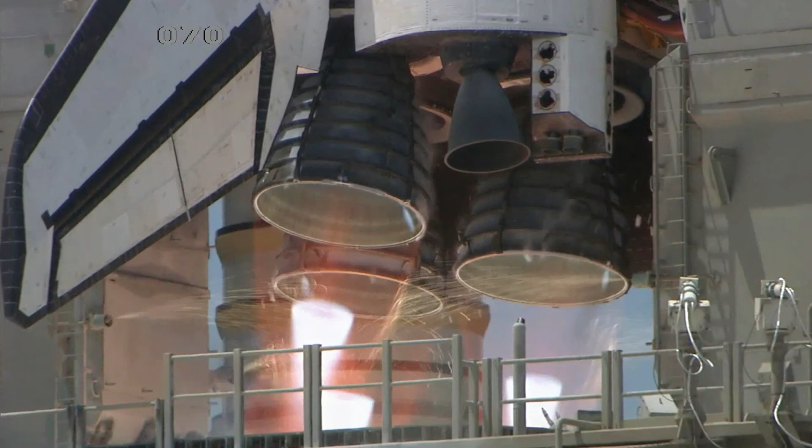Engineers use light metals because of their favorable mechanical properties. From the fields of aerospace, renewable energy, and electronics, we present some examples of mechanical properties in modern and future applications.

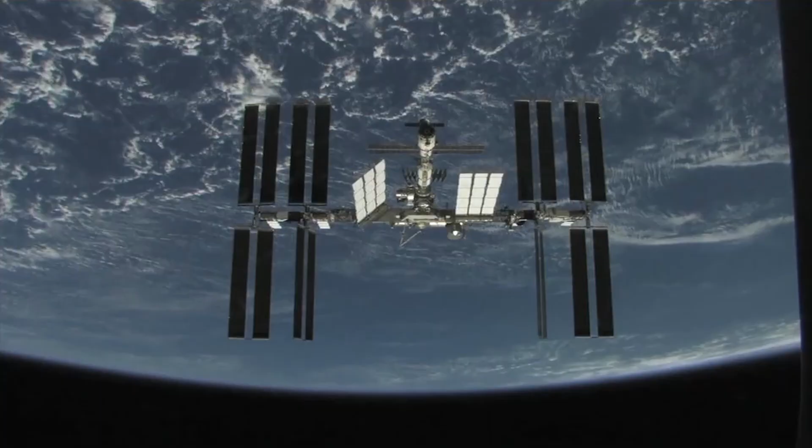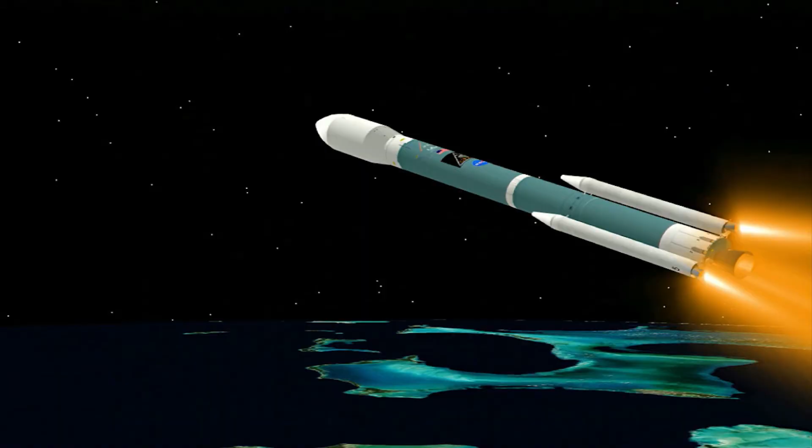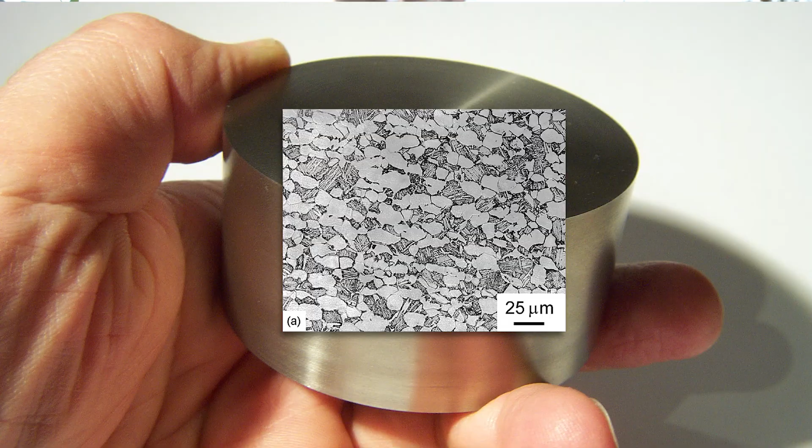Light metals are important for the aerospace industry, including aircraft and rocket applications, primarily because they're lightweight. But it's not just that they're lightweight. You still need the material to be strong and durable and survive varying amounts of heat exposure. When you combine all these things, aluminum alloys and titanium alloys end up being extremely favorable for the aircraft and rocket industry. Specific strength is an important concept in materials engineering, and it's the ratio of the strength to the density, or the material's weight.

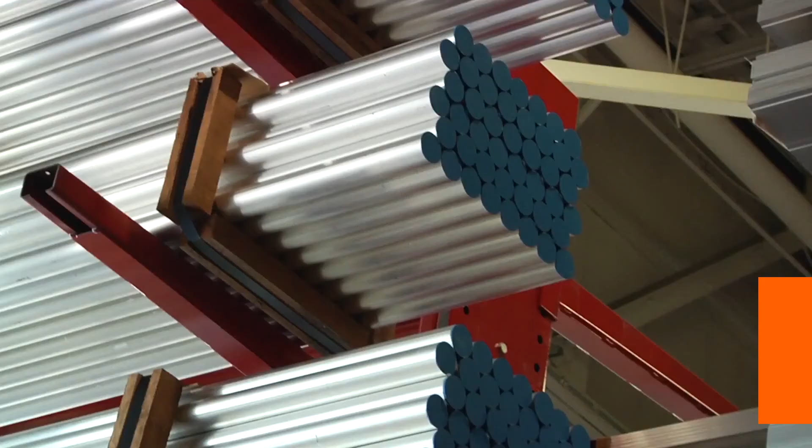This is important because aluminum alloys, for example, aren't as strong as steel, but they're a lot lower weight. When you scale your design according to that specific strength ratio, you find that aluminum is very favorable for many designs. Aircraft made from light metals consume fuel at a lower rate than those made from heavier materials. Although the structure may be thicker, the overall decrease in weight for a lighter plane is more desirable, making modern air travel affordable and efficient.

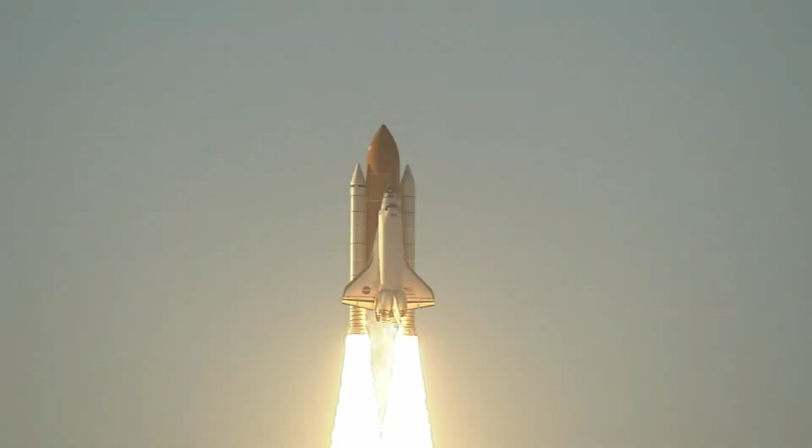Today, there are many aluminum alloys to choose from that offer a balanced set of properties to meet a variety of design needs. Advances in aluminum alloy development have created tailored alloys for specific design goals. Another aluminum alloy that's less common in widespread industry but still important is the 8000 series, which is aluminum alloyed with lithium. The main purpose of this alloy is that we still get good strength, but it's even lighter than other common aluminum alloys. It was used for the Space Shuttle external tank, where every pound or fraction of a pound literally means thousands of dollars in efficiency.

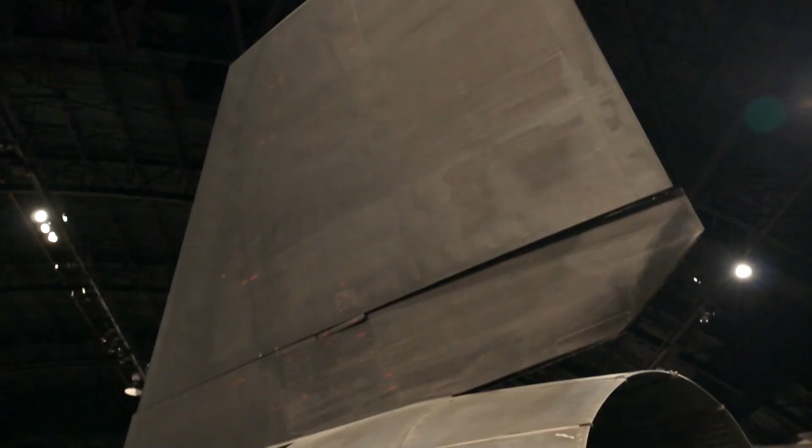One limitation of aluminum alloys is that they lose their strength starting around 300 Fahrenheit. Another lightweight metal that doesn't lose its strength at temperature is titanium alloy. Titanium is very strong, extremely tough, and holds up at temperature. Probably one of the most famous examples of the use of titanium is the SR-71 Blackbird. This aircraft travels at supersonic speeds. The heat generated on the skins just from friction traveling through the air requires a material that can hold up to the heat. Aluminum skins, unlike a commercial aircraft, would never hold up at those speeds. So titanium becomes extremely important to us at those temperatures.

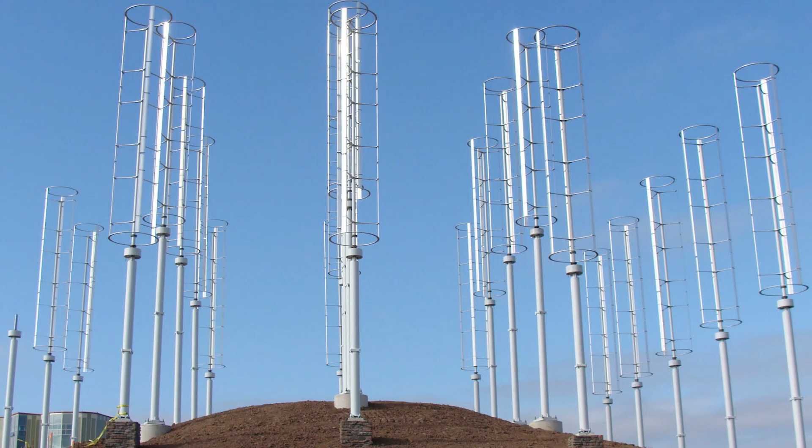Renewable energy such as wind and solar power is a growing field with great potential for light metals. While small wind turbines for urban use are typically made from aluminum, large wind turbine blades usually use composites. Current research is exploring hybrid fabric metallic constructs to decrease weight and increase efficiency. As this technology evolves, light metals may be key for the improved and affordable harvesting of wind energy.

When considering the design of wind turbine blades, one material that finds applicability is aluminum. It's readily available, well understood, has high fatigue strength, is lightweight, and we can easily machine it into different shapes for these blades. One thing I mentioned was fatigue strength. That's important because as your wind turbine cycles, as the wind goes on and off, you're going through a process called cyclic loading, where you're turning a load on and then off.

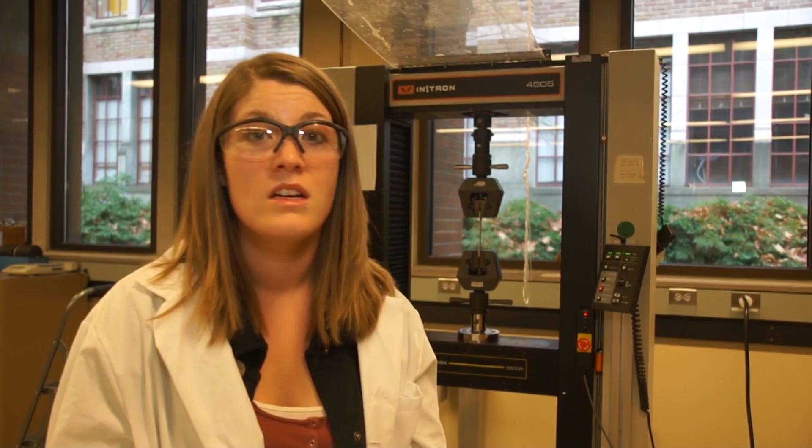What metals are known to do is fatigue, and too much fatigue can cause failure, so we need to consider fatigue when designing. In this test behind me, we would do a similar test where we're actually loading and unloading the specimen. That can give us information about the fatigue strength of the material.

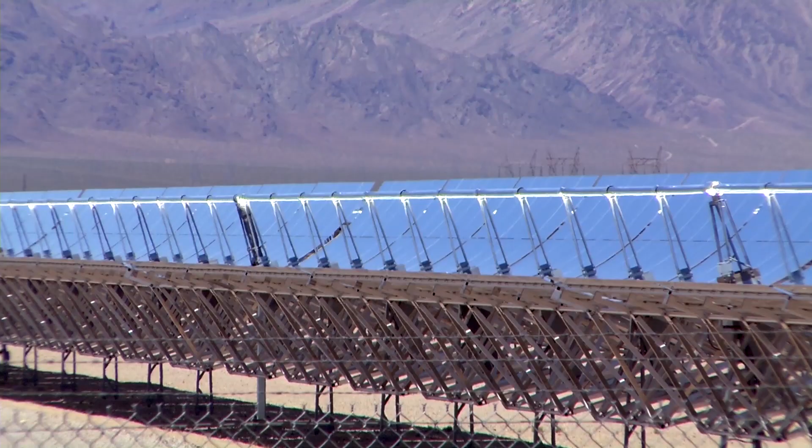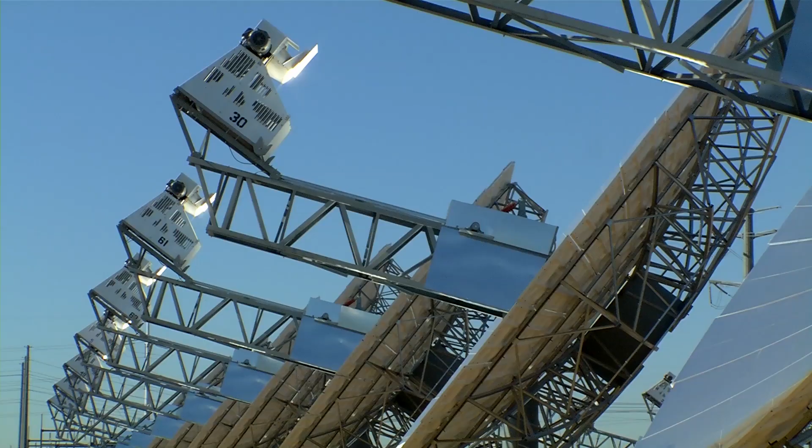Concentrated solar power is a growing area in renewable energy that uses highly reflective surfaces to collect the sun's rays. Like wind power, this sector sees the benefit of light metals in the development and fabrication of high-performance reflectors.

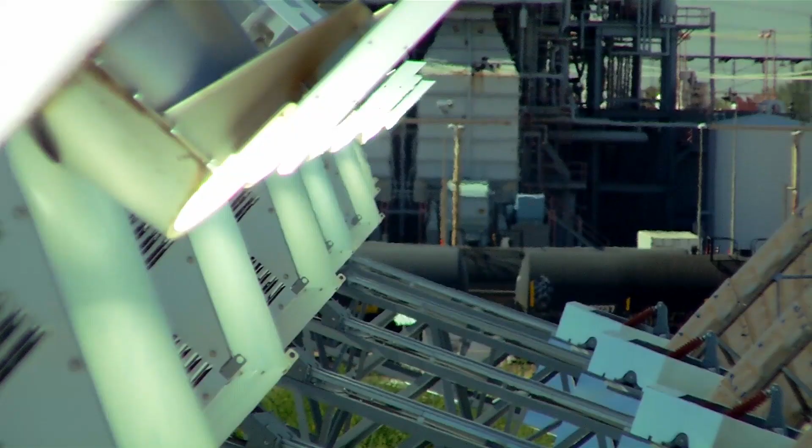Another important property to consider is hardness. Hardness is the tendency of a material to resist localized plastic deformation, and that's really important for concentrated solar power. The reason is that you want a material with lower hardness so that you can easily polish it to a high mirror finish. When it comes to the production of large reflective surfaces, low resistance to processing results in simpler fabrication and lower production costs.

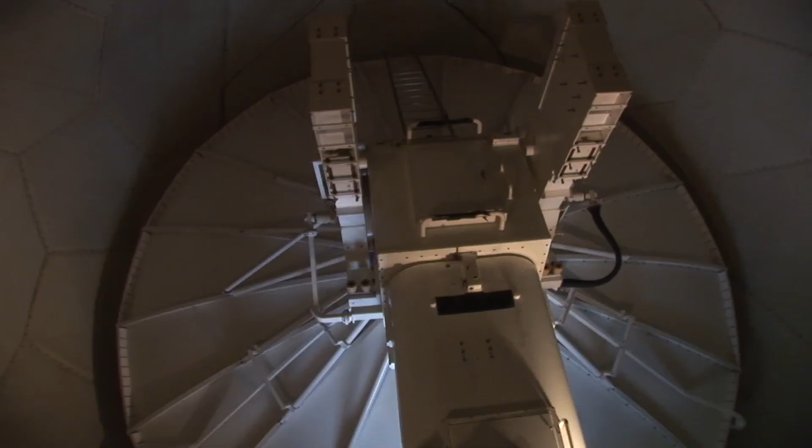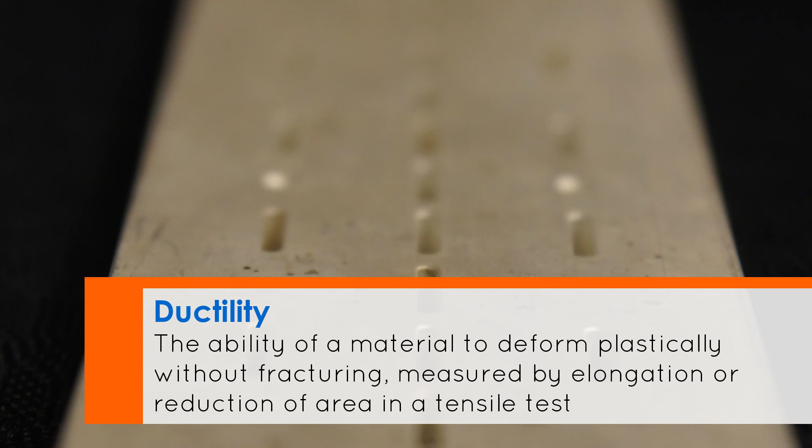Modern systems like satellites for telecommunications and radars for weather detection use light metals in their manufacture because of their high ductility and high toughness. These properties characterize the formability of the material and can easily be seen in the production of waveguides, used to transport high-power electromagnetic energy with little loss. Waveguides from soft metals can easily be bent into different shapes and at large angles without fracture.

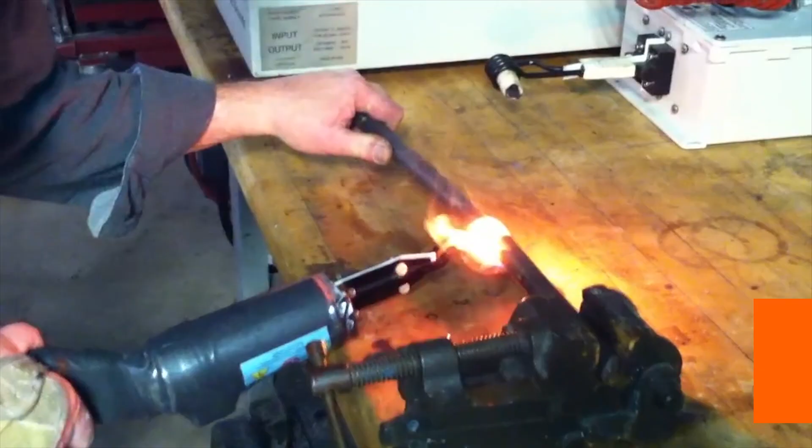The reason brass or aluminum is used is because it's ductile, so when you bend it, it's cheap to do quickly. If it was steel, you'd have to heat it up and need a steel smith to make it, but any machinist or operation technician can make a 90-degree waveguide.

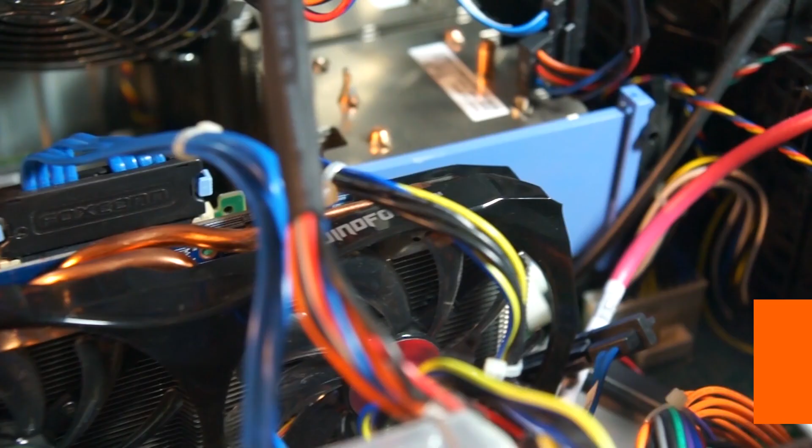The coefficient of thermal expansion is an important property in the consumer electronics industry. In the design of antennas for cell phones and GPS systems, small changes in length due to temperature can have a significant impact on performance.

Antenna design factors in a lot of spatial aspects. One thing we consider is what kind of housing and what kind of metal is going to be around the antenna. When we make an antenna, we tune it to interact with the surfaces and sidewalls, and everything around the antenna matters for how it works.

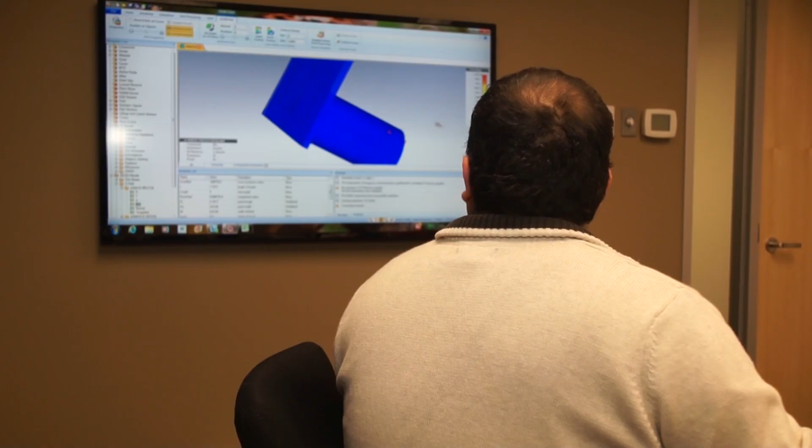Computer simulations are often used to study how fluctuations in geometry affect signal quality. Differences in temperature result in small dimensional changes which can create poor connectivity. This antenna here is interacting with its sidewall. As you can see, the electric field hits the sidewall, and this helps the radiation propagate forward.

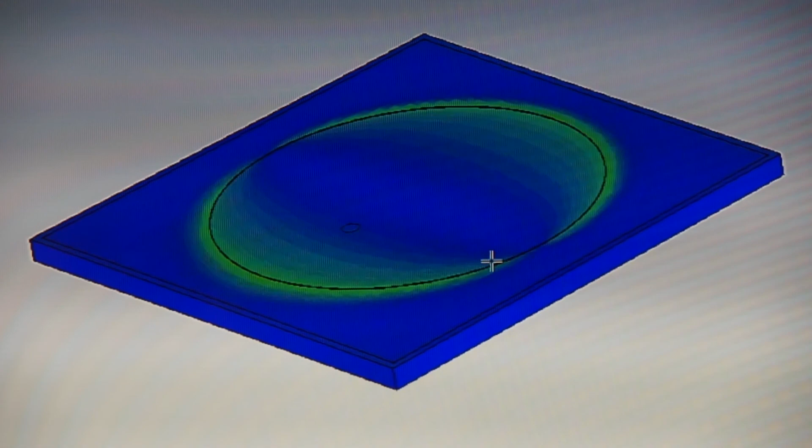With the thermal coefficient of expansion, if the dielectric tends not to grow as fast as the metal housing around it, this will detune the antenna. As we look further into the antenna, you can see the fields interacting with the sidewalls. If the sidewalls are not there, we get a different tuning. So when these sidewalls expand or contract faster than the dielectric, we get a separation, and that separation at high frequency can cause the antenna to perform worse.

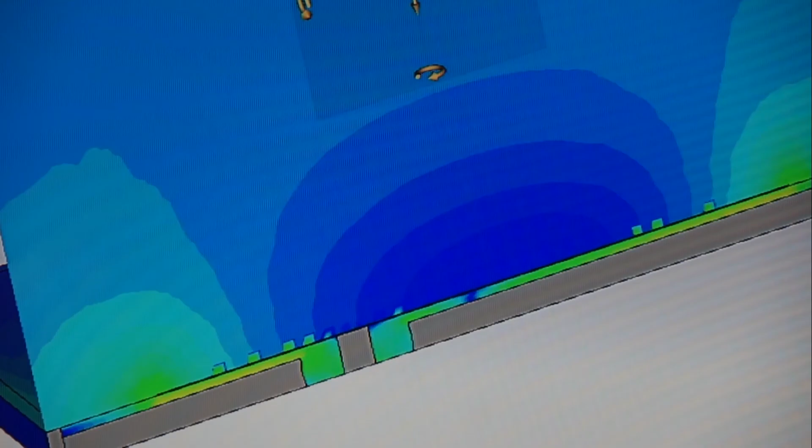You'd have dropped calls or interruption in your services.